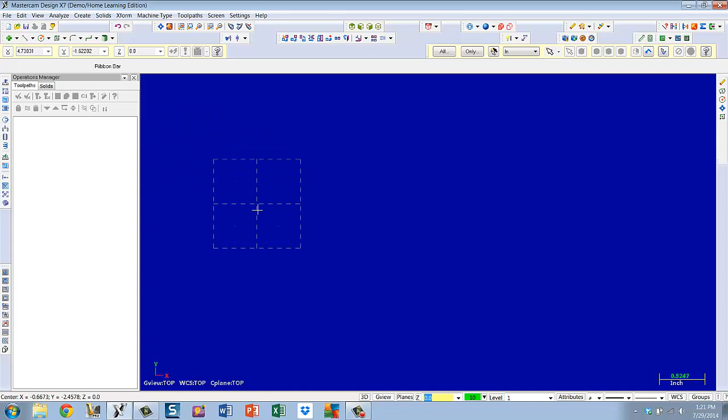Open a fresh MasterCam slate, and we'll start by creating a rectangle that depicts the stock we're going to cut the wrench out of.

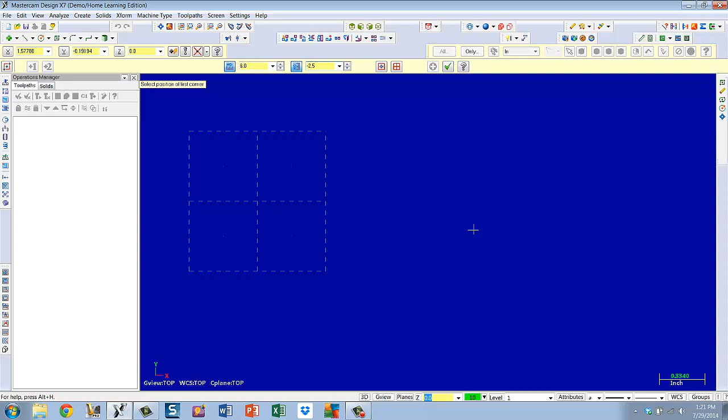The X value is 6 and the Y value is negative 2.5, because we're working in the lower right quadrant, so Y is negative. We hit enter. There's our phantom rectangle, and I will place it at the 0,0 origin.

We can mouse wheel this down or do a fit, mouse wheel it.

Now I am looking at this part and I see a series of circles and lines. I'll start by putting in some of the circles, the first one being the jaw of this wrench.

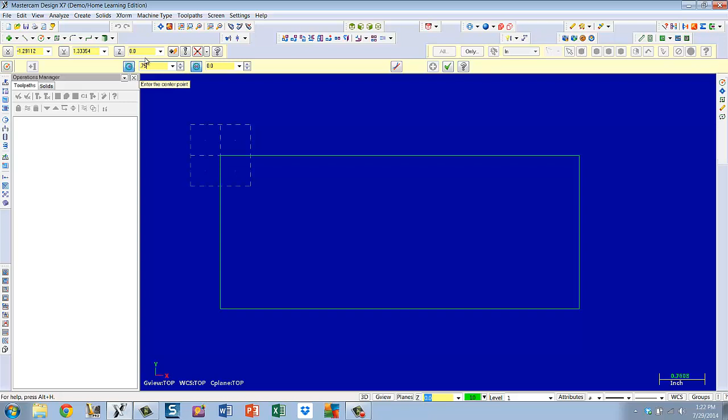Create circle center point, shortcut. The radius of this interior jaw is 0.75. Enter, get my phantom circle.

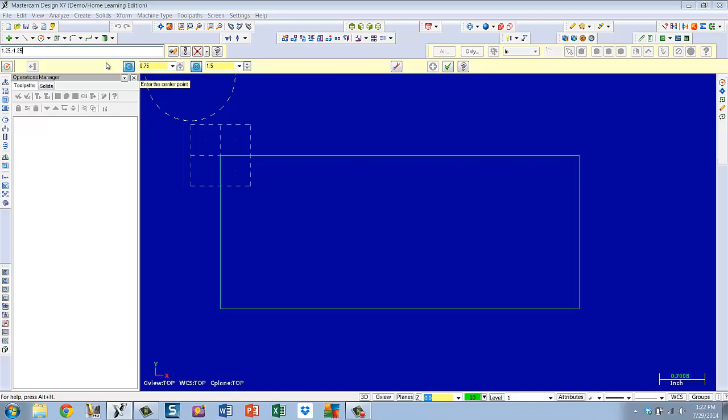Now I will go to fast point and put the location of it in. The center point of this circle is at X 1.25, comma, and the Y is at negative 1.25. Enter, and that circle is placed.

It looks good so far. I'm going to accept it, but stay in the operation because I want to do some more circles. I'm going to go back to the tail end of the part, put those two circles in.

One of them has a radius of 0.625. Enter, get my phantom circle.

Go up to fast point. The location of this circle is 4 inches more than the center point of the first one, and that calculates to 5.25 inches, comma, and the same location in terms of the y-axis, negative 1.25 - that's basically the center line. Enter, and that hole is placed.

I've got another one with a diameter of 0.75, enter. Okay, see, I didn't hit apply, so it overwrote it.

Sometimes that happens, sometimes it doesn't. I'm going to go ahead and keep that one, and I'm going to have to go back and redo my radius 0.625 circle. Hit apply.

Go back to radius 0.625, enter. Snap to center point, and there I've got my two circles at the tail.

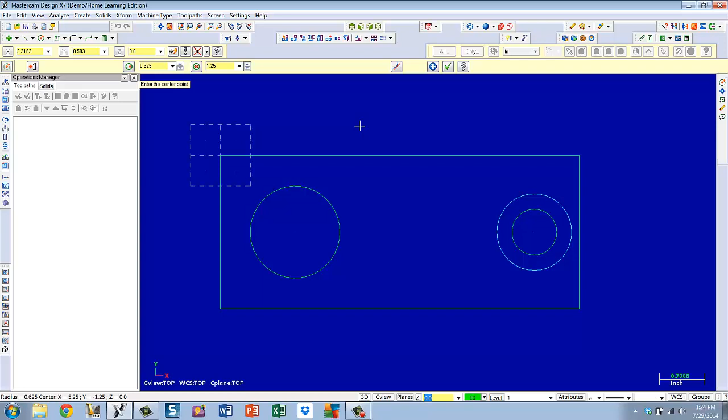This looks like a really good time to put the oblong shape in, so I'll go to create rectangular shapes, pick the oblong.

The width of this slot calculates to 1.75 plus 0.25 at one end plus 0.25 for the radiuses at the other end. Enter, that's 2.250.

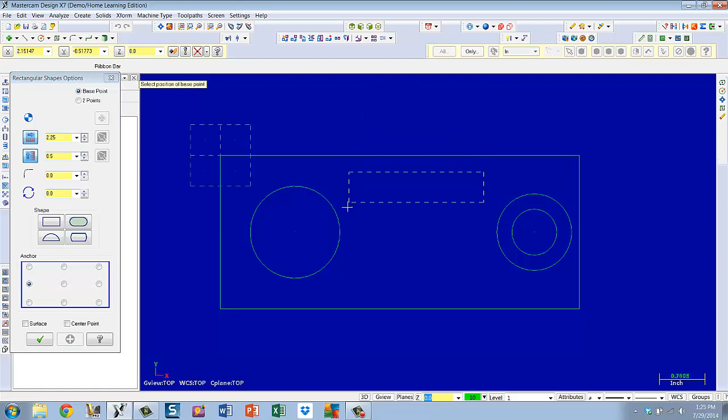The height is 1/2 inch, so 0.5, enter. And here's my phantom oblong. Now I've got to put the location in.

That is first determined by which one of these anchor buttons I choose to pick. Now obviously I'm going to go horizontally along the center line, as I've been doing everything so far, and I'm going to pick the left end of it because I have a print dimension of 2.375.

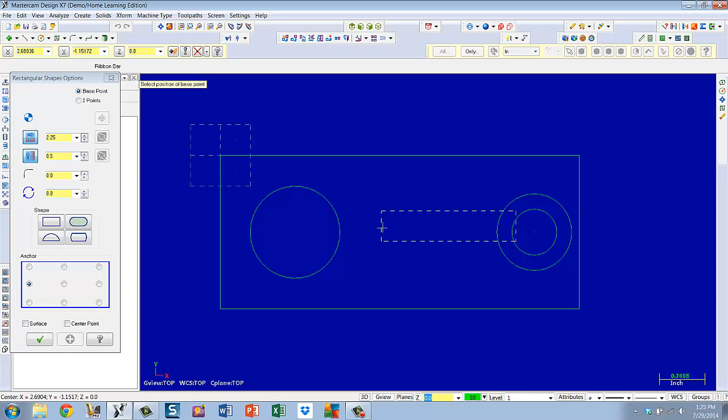So I go up to my fast point. In X I'm at 2.375 according to the print, comma, and the Y I'm the same old -1.25 inches to center. Enter, and there's my oblong shape.

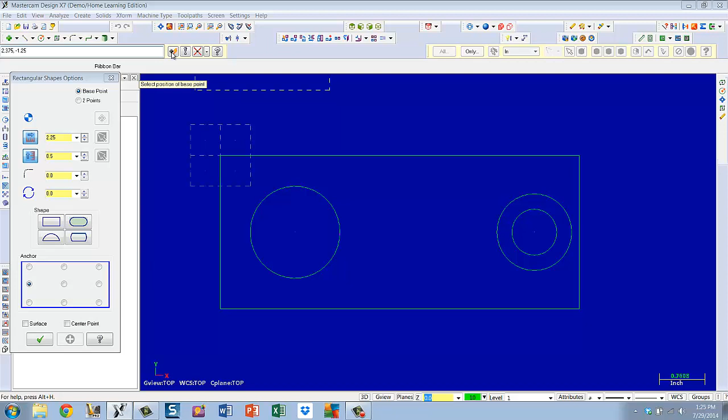Looking good so far. At this point I may go ahead and put in some parallel lines to that slot and work my way to the left. Create line parallel.

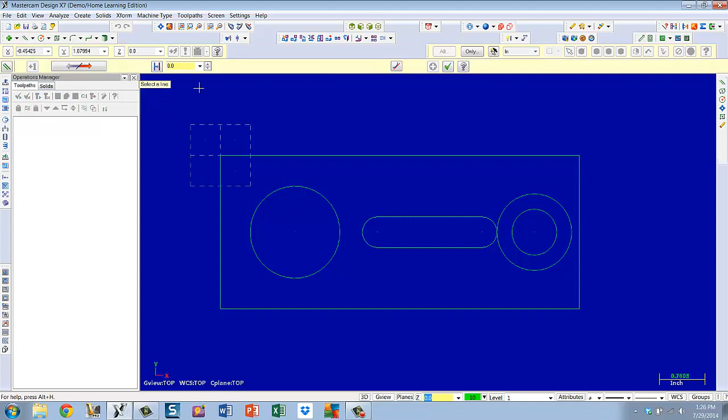Mathematically these are offset by 1/4 inch, 0.25. Enter. I'm going to lock it because I'm going to make 2 of these.

Select a line according to this prompt. Select a line, there's one of those. I'm going to select apply it just in case. Select a line and offset that. So those parallel lines look good.

Parallel lines, I'm sorry. I'm going to accept it. I'm going to go ahead and also work this part of the drawing through trim and extend. Here's a shortcut to the trim and extend.

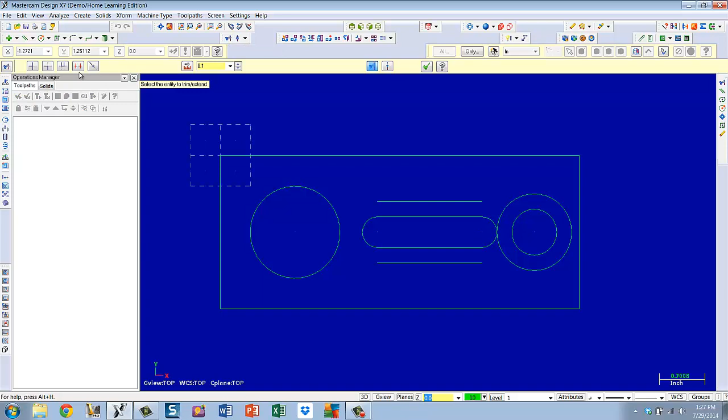By using the single button, it's telling me I want to make this line go to this circle, and this line go to this circle. Then I can activate divide, staying in the function still. Switch to divide, and that will take that out. See, when you hover it tells you what it's going to do ahead of time. That's really nice.

And now our part's starting to take shape. We'll accept that. I'm going to put some more lines in for that jaw.

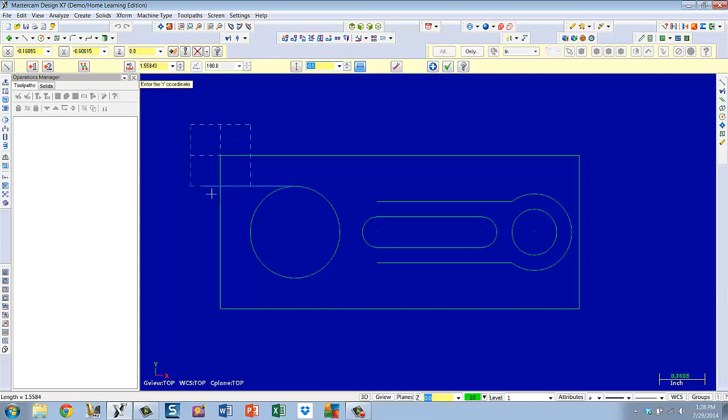Create line endpoint. Here I can just snap to the tangent of this circle. However, I want to make sure my lines are perfectly horizontal, so I'm going to activate that button. Snap to tangent, just horizontal out past the part. Snap to tangent, horizontal out past the part. And there's part of my jaw.

I'm going to accept that. I'm going to go back to parallel lines. These ones calculate to 0.375, or 3/8.

I've already got it locked. Select a line and offset direction. Select a line, offset direction. Those look really good. I'm going to accept them.

I've got one more parallel line I can put in, and that is the ends of the jaw lines. That amount is 1/8, or 0.125.

Select a line, this vertical line here, offset to the right, and that puts in the ends of those square jaws. Accept that, and now we've got some trimming to do.

Go to my scissors. The divide's on. I'll go ahead and use that here. Take that out and take that out. Now I'll go to...

Trim 2 entities, and what that is saying is it will make a corner for you. So you say I want to trim this line to here, and it'll go ahead and take the rest of the corner out. I want to trim this line to here, this line to here, and this line - when I go to this line, it should take them both out. Yes.

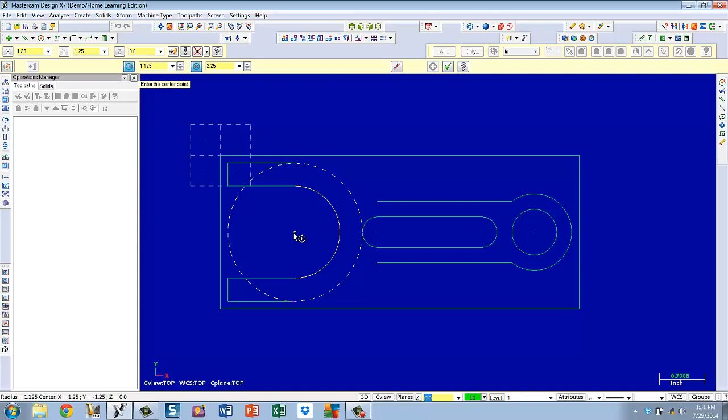I've already got a center point, so I'll just snap it to that. And that looks like it's in the right place because it matches up with everything. Accept it and check out at the same time.

We'll do the trim divide. Take that out. Then we'll go to our single trim, one entity. Say trim this arc to this line. Trim this arc to this line. Looking good. Check out.

Now all we have to do is put the angular lines in, and you'll notice the print doesn't even give us any angular lines. And that's because we're just going to do the intersection point tangent to that circle we just put in.

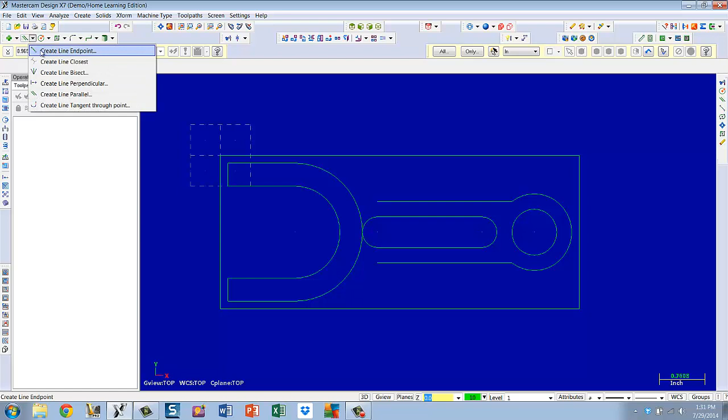So you go to line, endpoint, snap to the end of this line. I forgot to activate tangent, but you can still do it in the middle of your operation, because here we have vertical and horizontal. This time we want tangent, and it'll go tangent to that line. Snap to the end of this line, tangent to that arc, and there they are. So that's the way to use tangent without any angles.

Accept that and check out. We've got a trim now again. Hit the scissors, use the divide function. It may take 2 steps because it's hitting something else.

Very good, accept that. The last thing we need to do is, if you look at the lower right of your dimensions on the print, it says there's 4 fillet radiuses of 1/4 of an inch.

Here's my fillet shortcut, 1/4 inch is already in there. I'm going to lock it and say fillet. It says select an entity and another entity. Start again, select an entity and another entity. Again, select an entity and another entity. And number 4, looking good. Accept and check out, and there's our geometry.

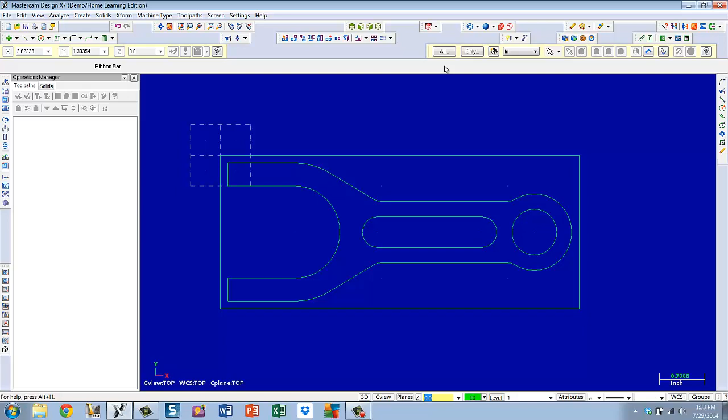Now we can start to set up a machine and start cutting the part. Having selected our default mill and creating this machine group, I take a look at tool settings. I set everything the same as we've been doing all along, except I'm going to change this program number to 6, because this is your 6th job. It's not really that important.

The stock setup, we're using the top view. It's a rectangular piece of stock that we want. We're going to ask for a wireframe display, that our origin be set at 0,0,0 in the upper left hand corner of the stock. Our stock thickness in terms of the Y direction is 2.5 inches. We don't use negatives here because we're talking about stock thicknesses. It's 6 inches in the X and it's 0.625 in the Z. So that all looks good.

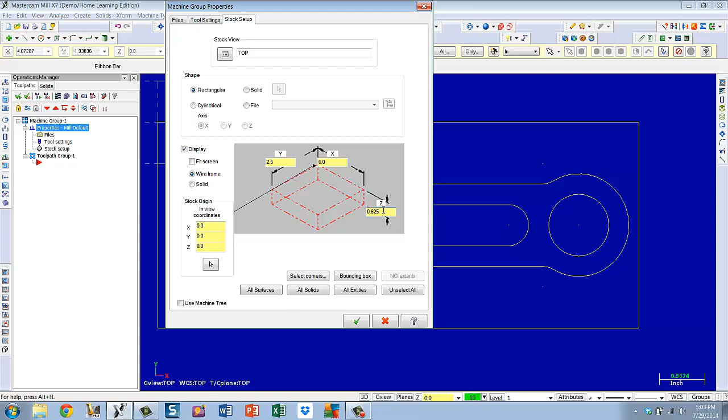Now we can start machining our part. The directions on page 252 ask that we remove the material in the slot first. If you look at these pictures, the slot is blind. If you look at the print, the section AA view also shows that the slot is blind, but there's a discrepancy with the isometric view on that print. It shows a through slot. We need it to be blind.

It's at a depth of 0.1875. So we go to Tool Paths, Circle Paths, Slot Mill. Don't worry about the NC name right now, it's going to change later anyway. We're set on chain, pick this chain. It lit up very nicely. It's closed and solid, closed meaning there's no exit, which would be the red arrow. I'm going to switch it to clockwise direction and check out of that.

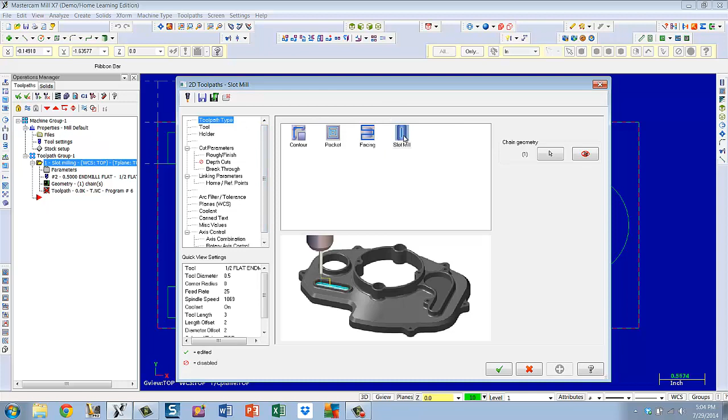Now I work my tree view list for this operation. Slot mill, the tool is a 1/4 inch flat end mill. I've got one here because I practiced, so I don't need to go through the tool library. Here I want to say machine slot, so that'll show up in my program accordingly.

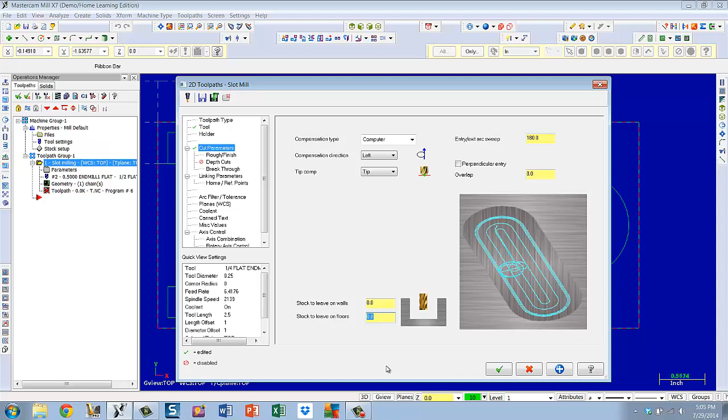Jumping to cut parameters, these all look good, except I don't need to leave any stock anywhere because this is an acceptable machining process. This is usually used when we're doing high-speed milling because it's kind of choppy and it doesn't leave a good finish. So rough and finish, we'll leave those the way they are.

Depth cuts, we want to take off 0.100 at a time in layers. Let's go ahead and put a finish cut in the floor of this, one of them, at 0.02 since this slot is so shallow, and we'll keep the tool down. There is no breakthrough, we're going to disable that.

Linking parameters is where we set our depth. Everything else should be basically this pattern. Our depth is negative 0.1875. That looks good. Let's go ahead and backplot it.

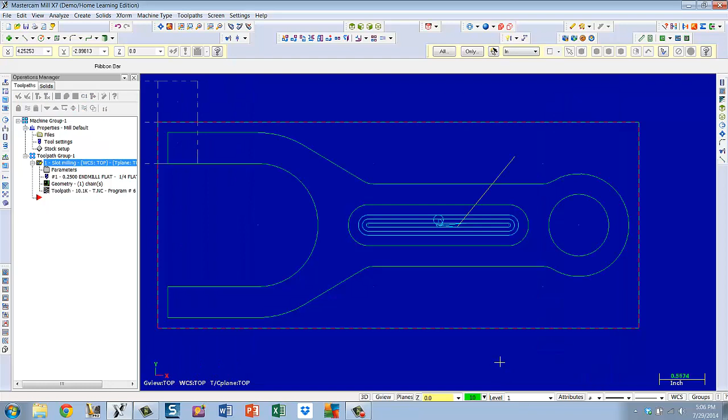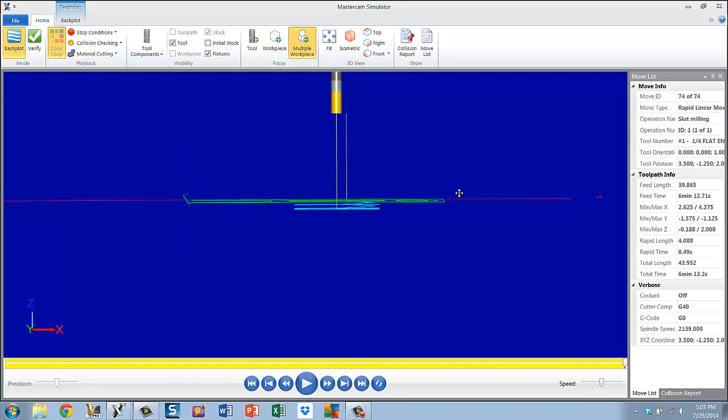Fit, isometric, and play. We're inside the slot, so that's good news, and we are below it, and that's good news. See how we ramp in as we go, 100 thousandths at a time. And there's our finish cut as well. We zoom in on this - 2 rough cuts and a finished cut. Exit out of that.

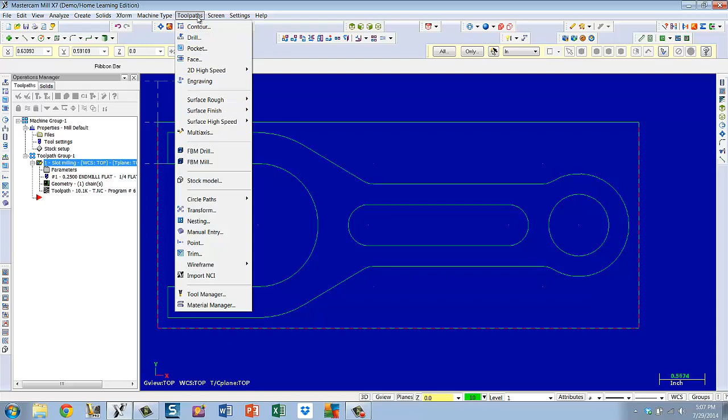Our next operation is to circle mill the 3/4 inch hole. It says 1/4 inch hole, but it's a 3/4 inch hole using a 1/4 inch end mill. So we go to tool paths, circle path, circle mill, pick an entity, not a center point. I want to pick this entity. It lit up, it's picked. Check it. Circle mill, tool - again, it's the 1/4 inch.

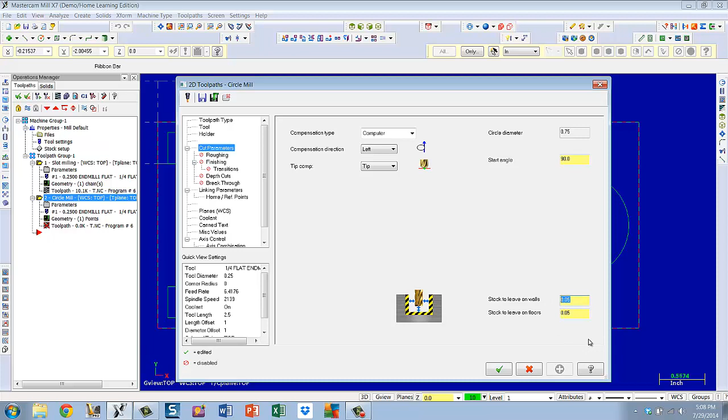Machine, hole, cut parameters. We don't need to leave any stock. This is an acceptable operation, meaning the finish will be fine. You won't have to go back and rework it. You'll see that going forward when we do that.

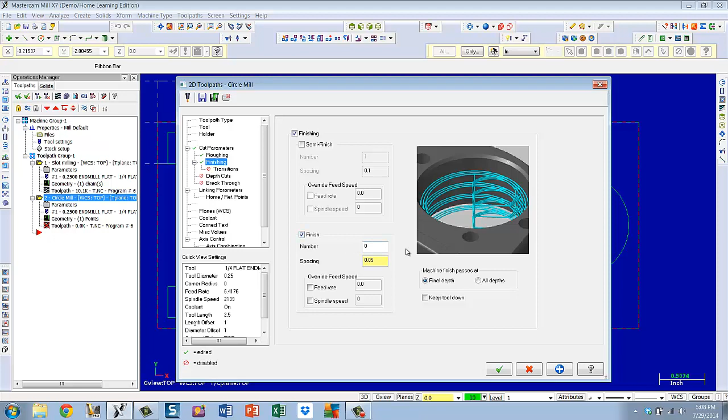We are instructed to enable roughing, so I will. We'll do a finish cut on the sides because we're going to break through. One finish cut of 50 thousandths. Those look good.

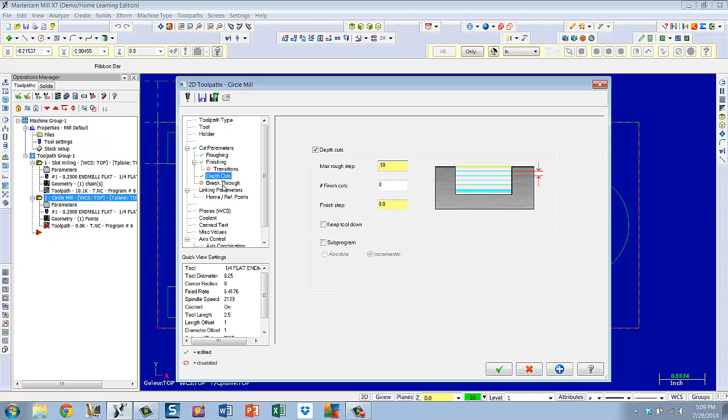Depth cuts we will enable. We'll take 100 each time, each layer. We won't need a finish cut because we're going all the way down through. I mean, it's going to be cut off when we flip it and face the part. So in a sense, we're using a breakthrough because we have a 5/8 piece of stock and a 1/2 inch part, so we'll have an 1/8 inch remaining.

That's 0.125, so instead of breaking through on 100, I'm just going to break through on 50 just to make sure we're good. Set our depths and linking parameters, and this is negative 0.5. Keep that. This operation selected - this is the one we want to backplot.

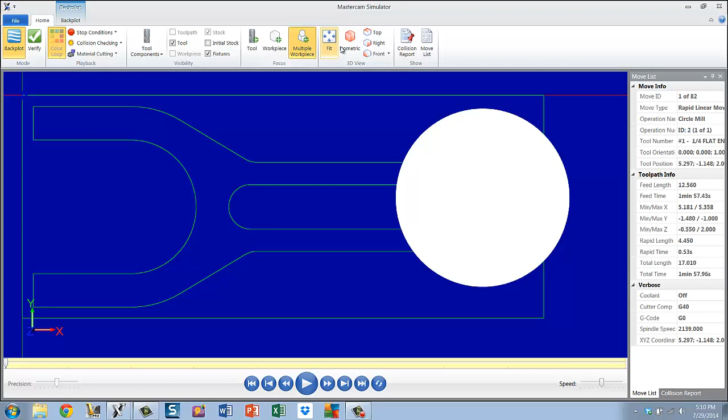Those settings were fine, and we went to the right depth. We spiraled in. Excellent. Next, we want to rough the outside profile using 2D high-speed dynamic core mill. Toolpaths. 2D high-speed dynamic core.

Chain. We want to pick this box and reverse it to clockwise. This is why we use geometry to represent the stock, because you can't just pick stock. And when we're hogging a lot of stock out of there, we want to set limits. And this is what we're doing right here.

I'm going to select that, and then I'm going to go to multiple machining regions, and I'm going to pick Avoidance Region. And it says to pick a chain. This is the chain. I want to reverse that. And see, my whole wrench is the avoidance region. So it's going to take between the wrench and this boundary.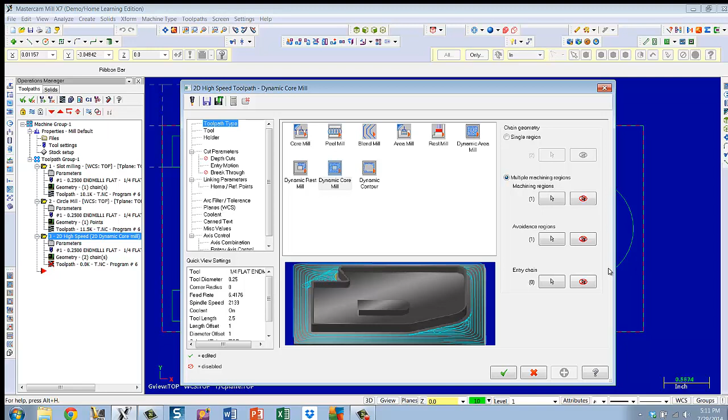And it's going to do it in high speed machining, which is a relatively new concept. It has to do with extremely high RPMs, and it just kind of pecks at the stock and allows chips to be removed and not a lot of flexing. It's very stable, but it doesn't do a great finish. So that's where your leaving stock business sort of comes in. And you can do it any time, but this is where you want to do it most frequently.

The tool they ask us to use is the 1/2-inch flat end mill. And here we're going to rough the outside. Cut parameters are very different for every operation, but especially these high-speed ones. Refer to the settings you used in tutorial 3 when we first tried this. Approach distance lights up when we highlight. It's down here. It's how we're going to approach the stock.

We used 0.5. That's the diameter of our end mill, so that makes sense. It's pretty efficient. This gap size, we can set a distance, or we can just go off the tool diameter. You see, it wants to know gaps from this island and gaps from this island out, and we basically made it 5 times the diameter of the tool, so it's 5 full strokes away.

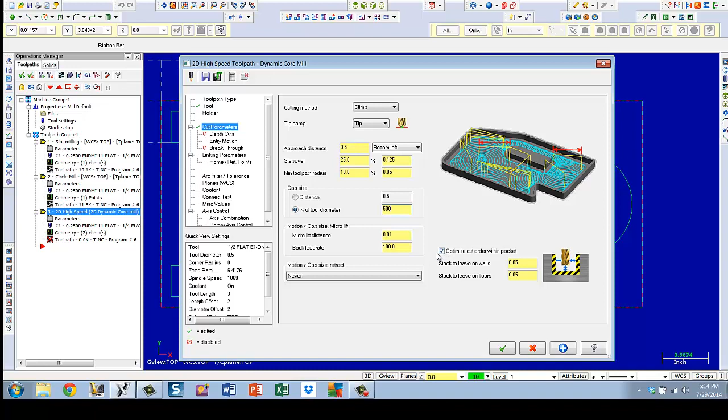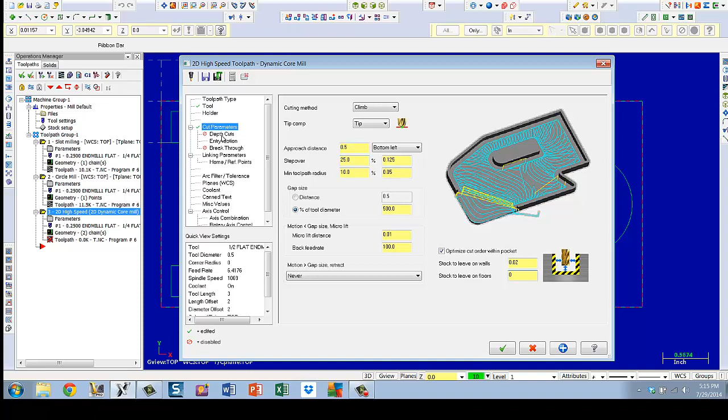The book instructs us to leave stock on the wall only. I'm going to just leave 20. We don't need to leave any on the floors. We don't care about the finish of the floor because we're going to flip the part over and face all that off anyway. We don't use depth cuts on here. We take the whole thing in one shot. Entry motion, helix, and those parameters are fine. We don't use breakthrough on this.

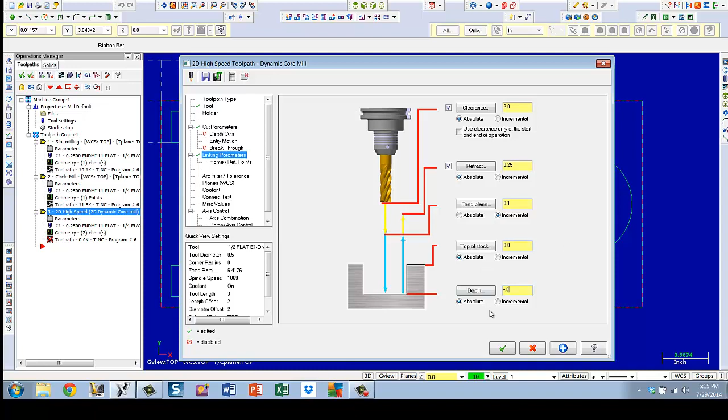And now we set our depth. Our depth is -0.5 because it's the full thickness of the part. We're not using breakthrough because we don't want to break through all of that. We'll use breakthrough when we do the finished contour, and you'll see that play out as well. Take that. This is selected. BackPlot.

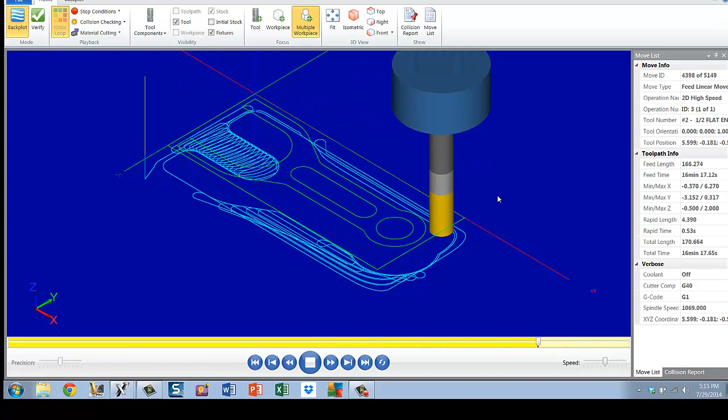That's sort of that efficient thing where it just tries to stay in one spot and finish the job before it moves around. So I'm going to go to parameters. Cut parameters is on. This optimized cut order within pocket. That's what makes the cutter stay and do as much work as possible without moving, as we saw on the BackPlot.

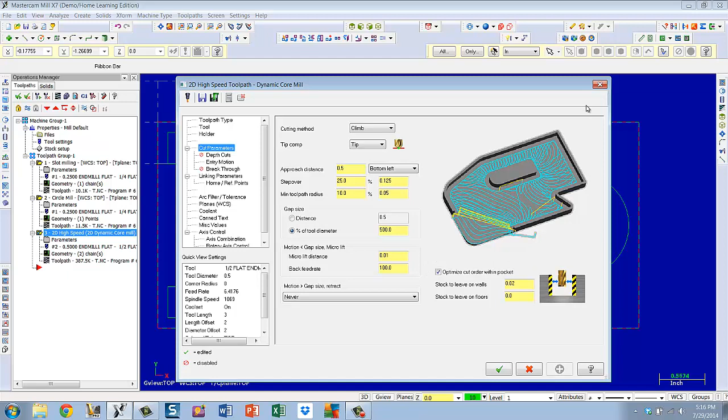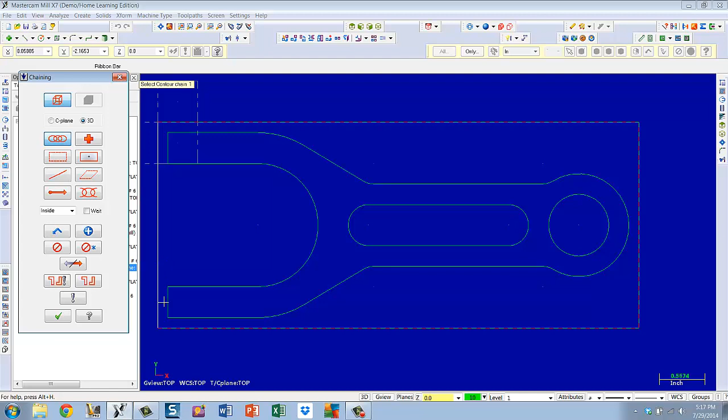Our last operation before we go to another setup is to finish the outside profile using contour and a 1/2 inch flat end mill. So we go to Toolpaths, Contour, pick the chain, same chain as we just roughed, and we left stock on. Looks good, close, pick the chain, contour, the tool is the 1/2 inch, finish, contour, outside.

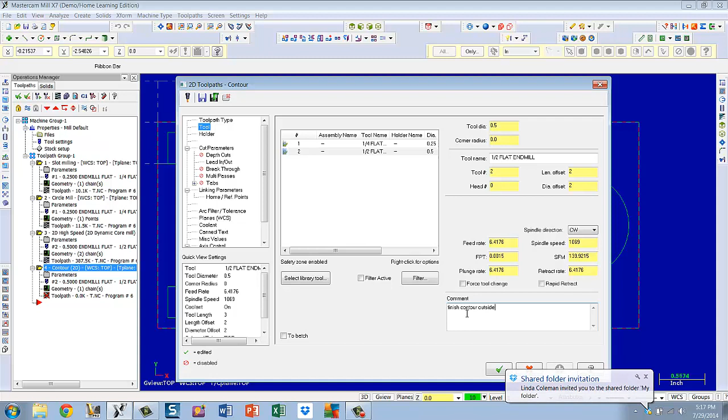Go to our cut parameters. Everything looks good here. We're not going to leave any stock anywhere. We don't need to use depth cuts here. We can do this all in one depth. Our lead in, lead out, we can just shrink our radiuses a little more if we want to be efficient. Our approach is 90 degrees.

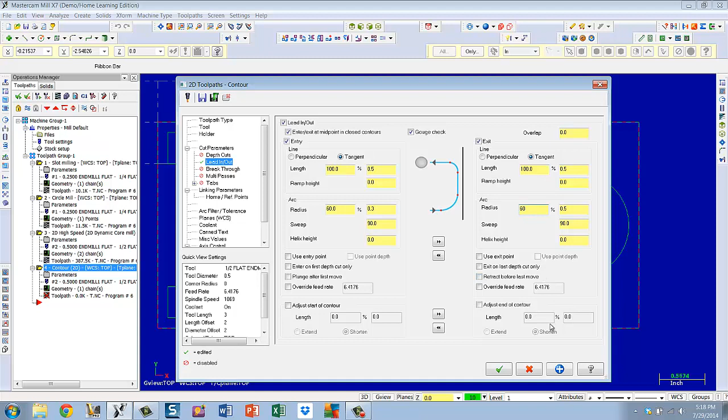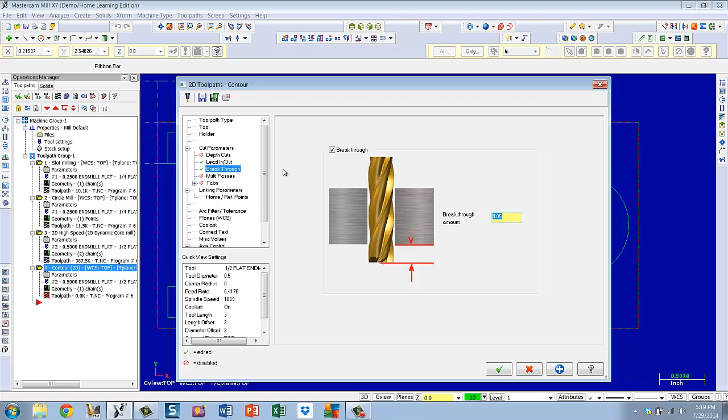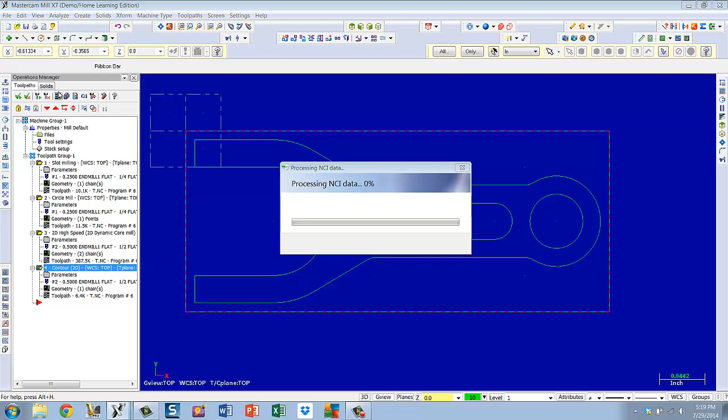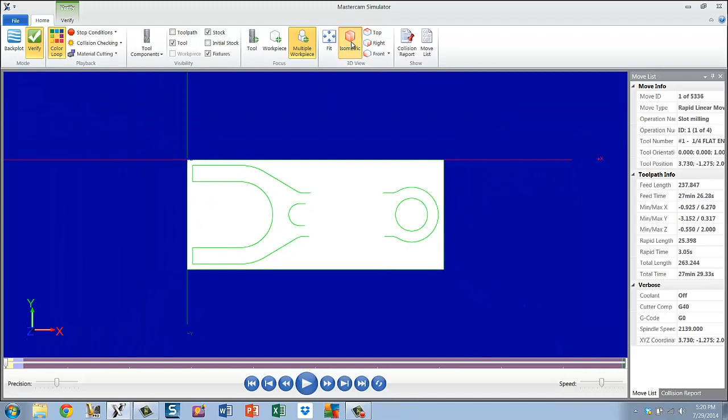So far so good. This is selected. Go to BackPlot. And run it. The path is on the outside. The approach and the exit look good. I'm going to keep that. I'm going to select everything. Now they're all lit up. Check, check, check, check. Go to verify. Fit. Isometric. Here's my 4 operations.

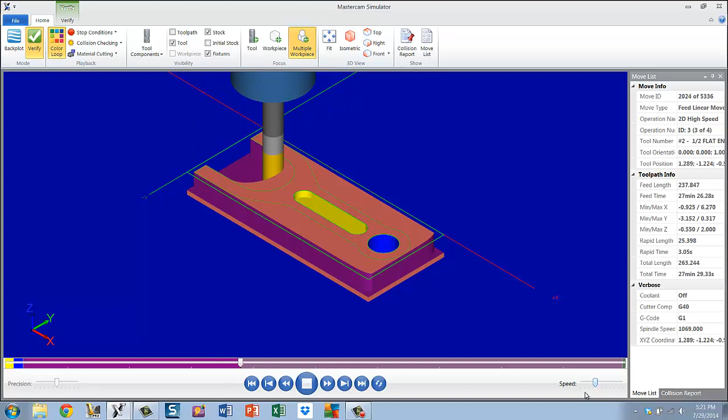1, 2. This is the big dynamic core mill that's hogging all that stock out, and then our finished contour is the green. Slow it down some and run it. There's our blind pocket, our through hole, even though they're not through because we have stock that needs to come off. Speed it up for part of this. See how it's working optimally? Start slowing it down now. At full depth it's working. Again, this is the high speed machining.

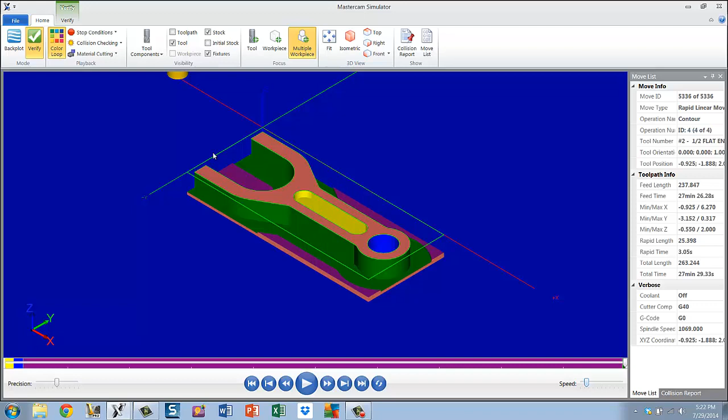Okay, that last contour was quick, but it was really just one pass around to finish without using high speed machining. So if we look, our slot is blind, our hole is much deeper, and probably when you face it, it's going to clean off. Wheeling closer, I can see that I didn't use breakthrough on the hog part, the dynamic core milling, but I did use it on the finished contour mill, just to make sure.

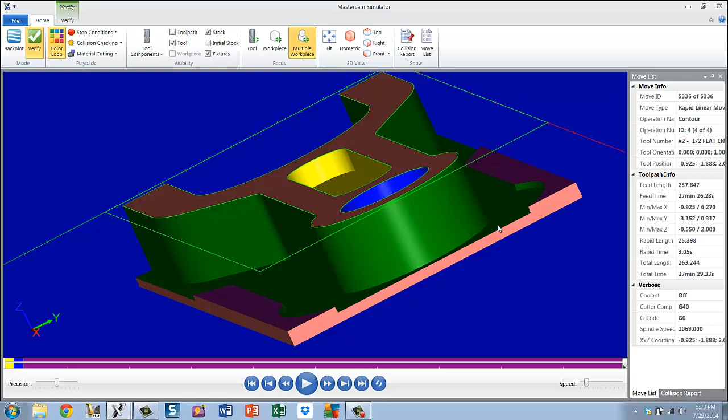So I'm beyond the 500 mark here. This should all hog off. It just really disappears. This is going to fall off when I do my thickness to here. Does that make sense? So that looks good. Check out of that. And now we are going to do our second setup, flip the part and face all that excess material off and be holding a wrench. Now all we have left to do in terms of operations is to create a new setup so that we can flip the part and face off the rest of the stock.

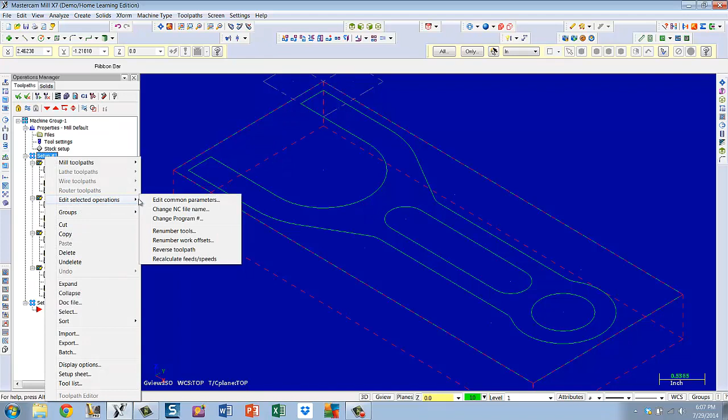Before I did that, I followed the instructions in your tutorial 3 from the book and clicked on this twice, changed the name to setup 1, then I right clicked on it and edited the selected operations, changed the NC file name, it needs to be 1. You'll see that show up here, setup 1 on each operation. Also our program number right here, if you hover, that's our 6th job.

I then right-clicked on the machine groups, and created a new toolpath group by clicking that. That's down here. And my insert operation arrow is subsequent to that new setup. So I'm ready to set up the operation, except for the fact that I need to approach it from a different view, in a new perspective. So I'm going to go down to the lower right to this World Coordinate System button. Select View Manager. I'm going to create a new view by selecting Geometry.

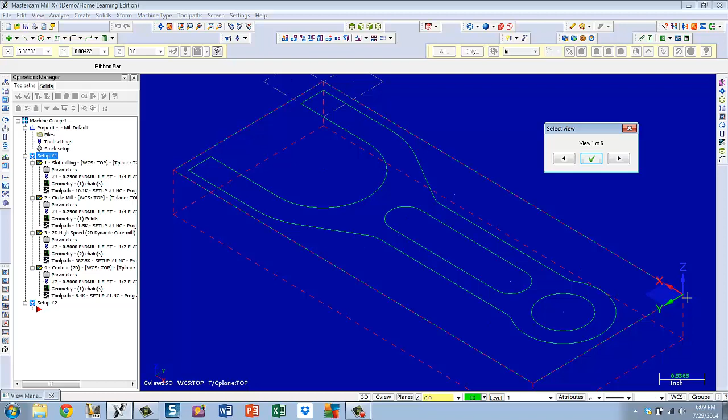So I'm going to pick something in the X and the Y on this, and it's going to give me a variety of perspectives and views. Basically, I need everything the same, except I need to change my Z-axis. I literally need to reverse it. The red means negative and the green means positive. And obviously these are incorrect because right now up here in my Cartesian coordinate, I am X positive and Y negative. So I need to try another view.

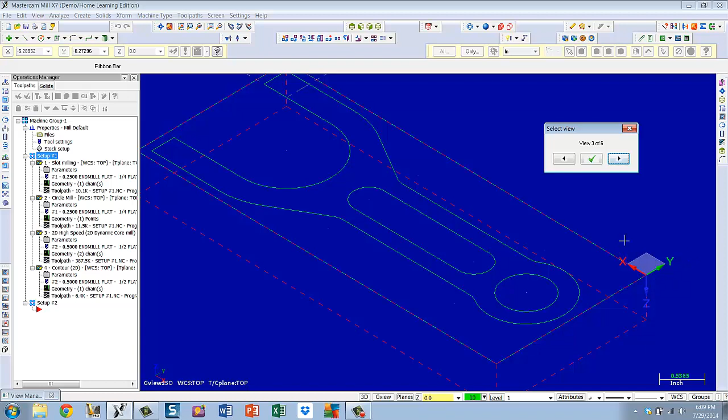I'm going to alternate and middle mouse this back over here. The next view offers me, first thing I need to do is look at the Z. I need a Z going in the opposite direction that it is now. That one looks pretty good. Z down, pointing down. Y positive is that direction, X negative is that direction. I'm going to accept that view and give it a name. Call it bottom view.

Say OK. And there it is. In order to activate it, because right now the top view is still active, this is just an additional one, I need to hit the equal sign, and that'll bring my construction plane and my tool plane and my active icon into view. Now I'll enable the origin. In the X it's 0, in the Y it's 0, and then the Z, my origin is now at positive 0.625.

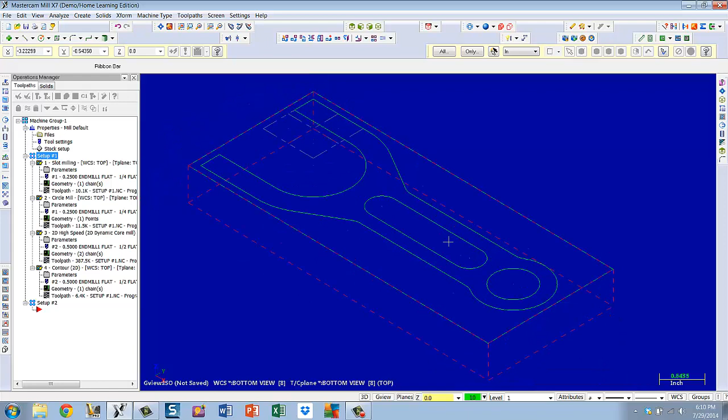I will check that. And that looks very good. See, I'm working on the other side of it now. Okay, so from here now we can insert our operation. We can go to Toolpath, Face, pick the chain. It's still this chain. I'm going to reverse it. I've just moved the Z-axis and come from the other side. That looks good. It's a face.

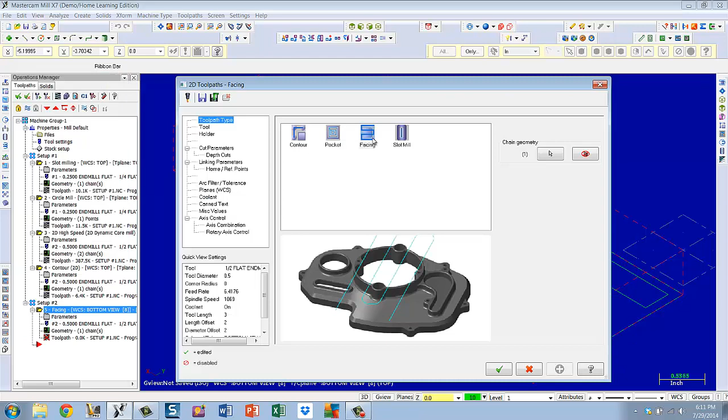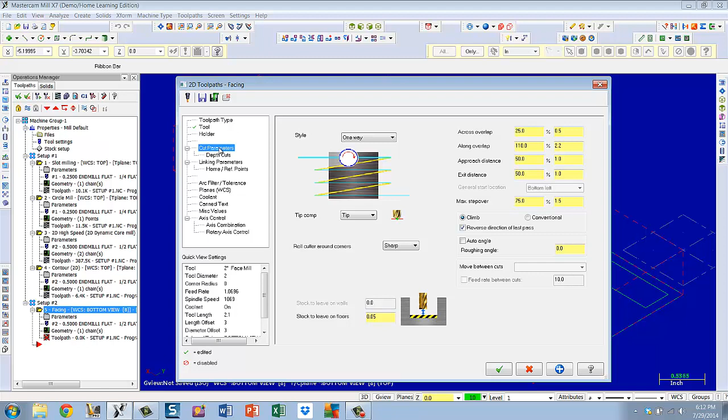The tool is, I need a 2-inch face mill. It suggested me one. I'll take it. Face the bottom of the part. There's my tool, my cut parameters. I want to go with the zigzag. Move between cuts and high-speed loops to save a little time. We're not going to leave any stock anywhere. Face mill's actually pretty nice. No depth cuts. I'm just going to hog it.

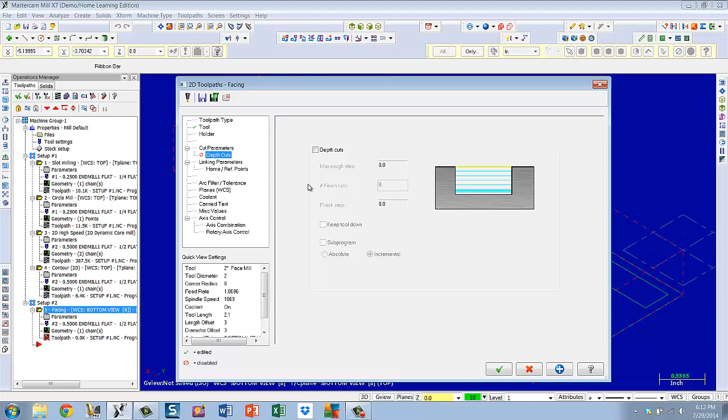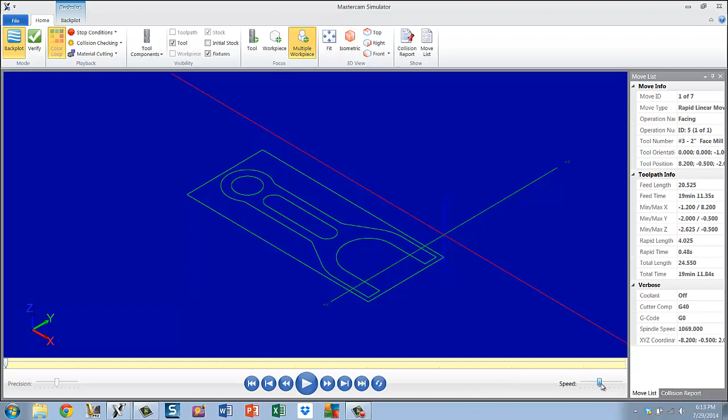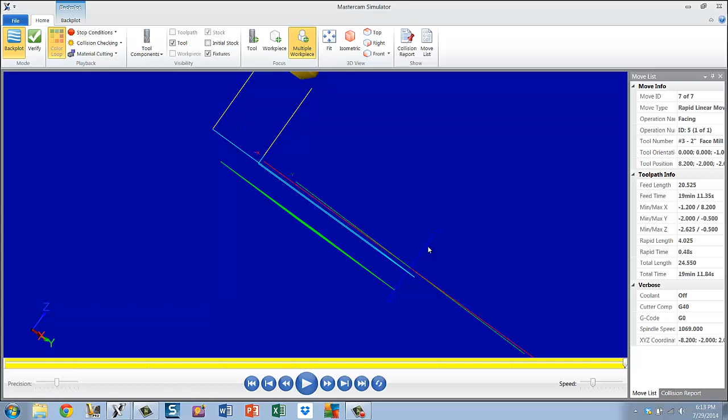There's not much left anyway because we broke through 50 thousandths of our 1/8 inch. So, and then our depth is -0.125. Well, let's try it. BackPlot. Fit and isometric. Slow it down a little bit and run the job. Let's zigzag in the x-axis. And that makes sense. And it looks really good because here's the rest of my stock. Here's my actual keeper part. Looking good.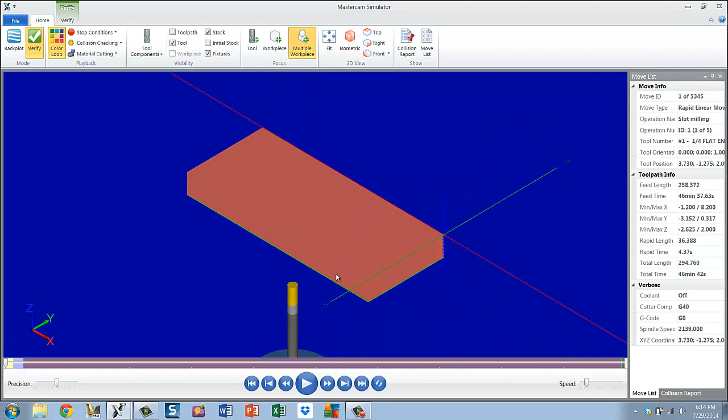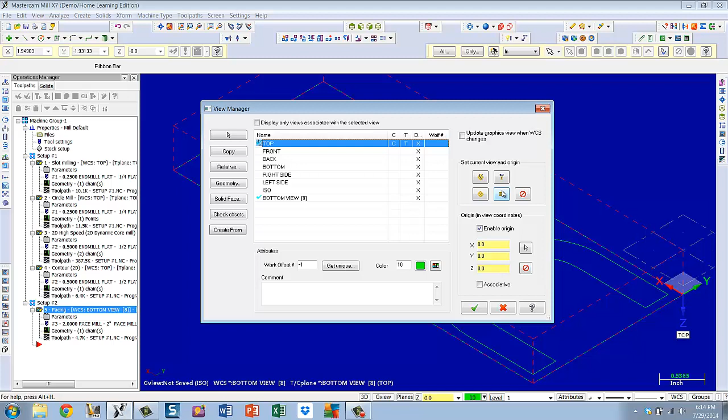Let's go ahead and pick everything, all the operations. Verify them. Fit and isometric. It's showing it to me in that plane now because that's my active plane. But what I can do is go back to my world coordinate system. I don't care if you do this or not when you turn it in, but what I can do is activate this view. Check it. Do my isometric. Select all. Verify. Slow everything down. And hit play.

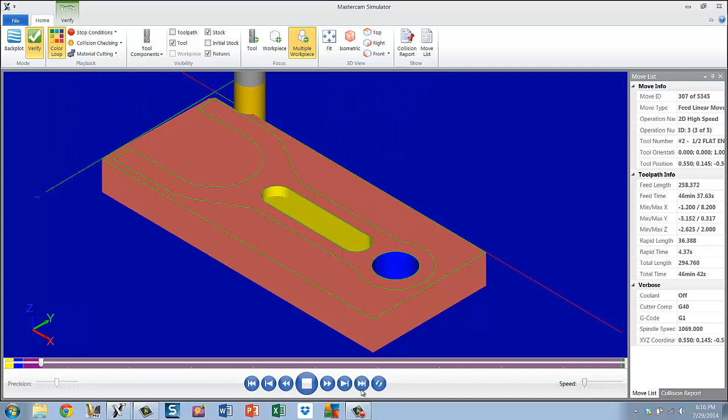We can pause at any time. There's our blind slot. There's our through hole, even though it's not through yet. Now we're doing the dynamic core milling. All in one depth. There's no depth cuts on this, which would be layers. We allowed it to optimize, which it's doing. This is the high-speed milling that is relatively new and only capable in modern machines.

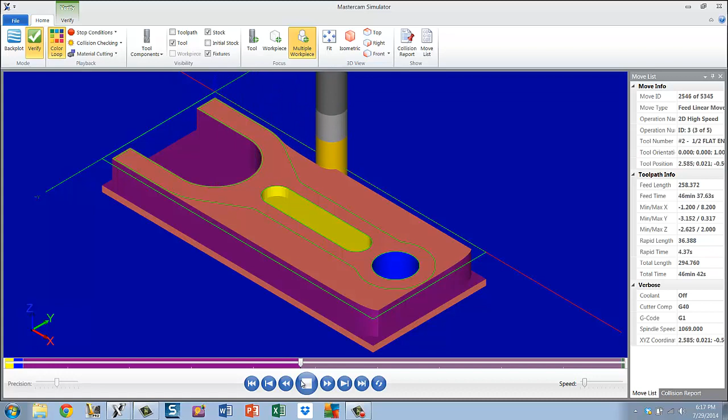It sort of pecks at the material, kind of like a piranha. It's really active and at extremely high speed and a lot of movement. Climb and conventional do play a part in this, but they're really pretty irrelevant. But you can take a lot more stock out a lot faster using this high-speed machining. Now it's working its optimizing capability that we checked. It's not moving around and wasting any time moving back and forth or anything.

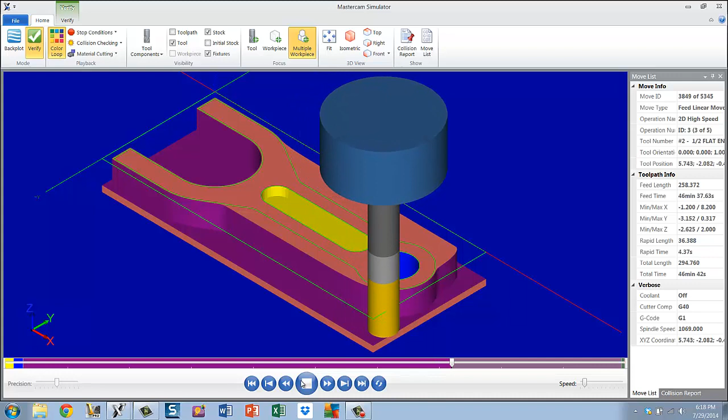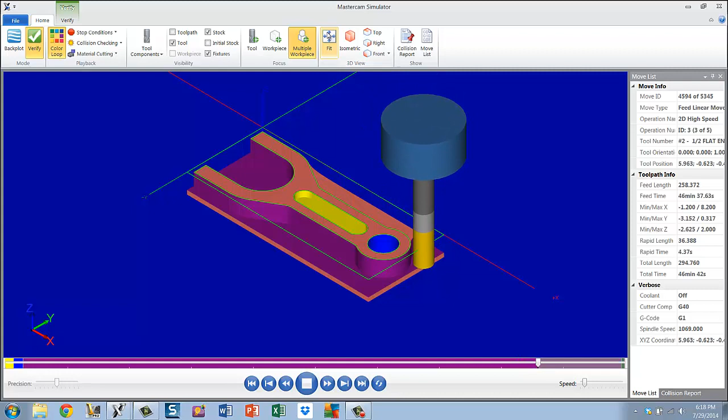I'm tempted to speed this up, but I really want to capture the fact that we left stock on here. I'm going to go and pivot it while it's still running. We left stock to do with the contour mill. See if I go real close. We left that stock, and we're going to go back and contour mill that later. I can fit and isometric while it's moving. But the stock is there. And we didn't do a breakthrough on the dynamic core mill because we're just going to face the rest of that material off the bottom.

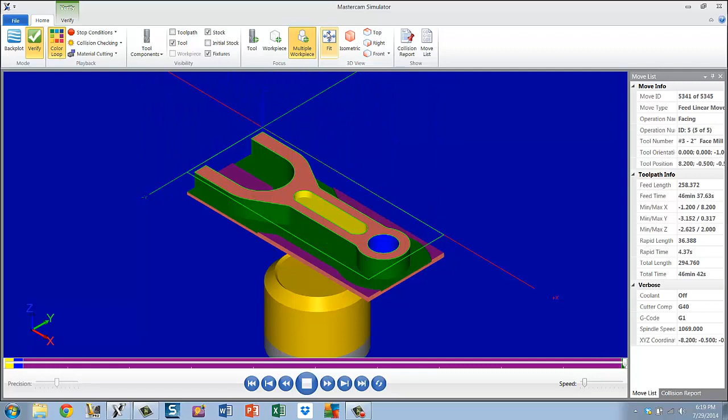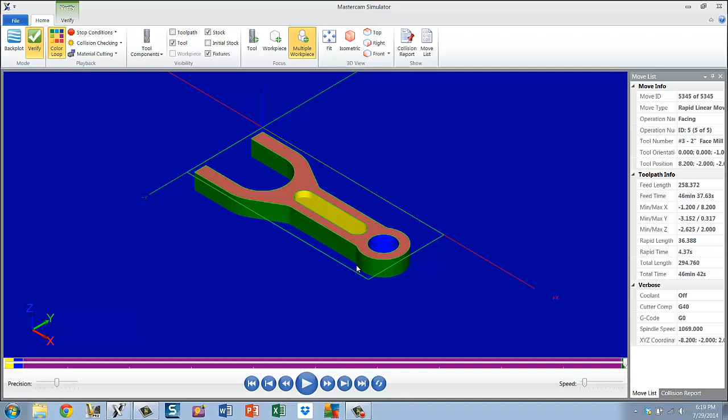But we did do a breakthrough on the contour finish cut so that we make sure we're finished all the way down. I think we broke through 50 thousandths of the remaining 125. And then, as you saw, and look how slow we were running it, it did the one finish cut contour, which is a better finish than the 2D high speed, and then it faced it off at the bottom. But that's exactly what we want. We need to close this window, I'm sorry.

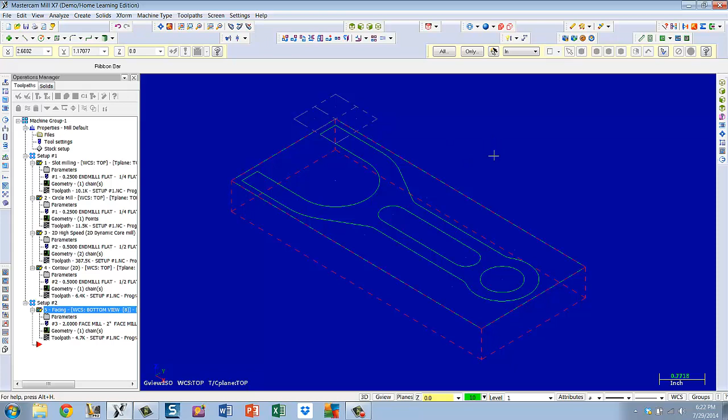You can turn this in to me in either the top or the bottom view that we created, I don't care which one of these views. Basically, I'm going to check your geometry and all the parameters within your operations. So, good luck.